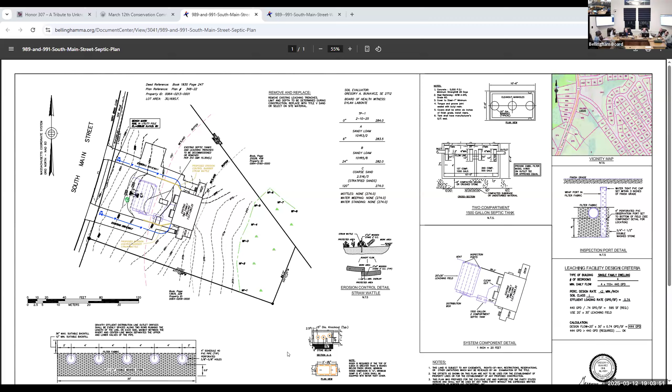I'm not fully aware where the existing one is, it's in the front yard. It's all going to be in the front yard. Is the existing leach field... it doesn't show where the existing leach field is, good point, it does say on the plans but I can't read it. Yeah, the existing leach field is in our front yard, there's really no other place to put it. Right, but I don't know if plus or minus 10 feet is the same, but the general location is the same.

I think it shows it right here. Which one's the existing leach field? This is the new one, where's the text? Arrow pointing: existing septic tanks and leaching trenches to be decommissioned or removed. Yeah, it just shows the tank. I assume there's two tanks there.

So we're looking at the new plans, just trying to identify the old tank, which seems to be right in the center in front. There's two tanks. There's two current tanks there now? Yes, it's a condo duplex. Okay, there's a new one, and here's the old one shown.

Existing septic tanks, but it shows one block - are they next to each other or side by side? No, they're on the front of each part of their own duplex, there's another one just south of it. A little confusing because the arrow showing existing septic tanks and leaching trenches looks like it's going to a single box, right center in the middle of the front of the building.

There's another arrow, and that's a tank that borders up against the driveway, I guess. There's an old tank overlaying on top of the new tank, in front of the driveway, 90 degrees to the new tank. So it appears there's a certain amount of removal of the existing system, one of the tanks and the leach field, to install the new one - actually, both tanks, according to the applicant.

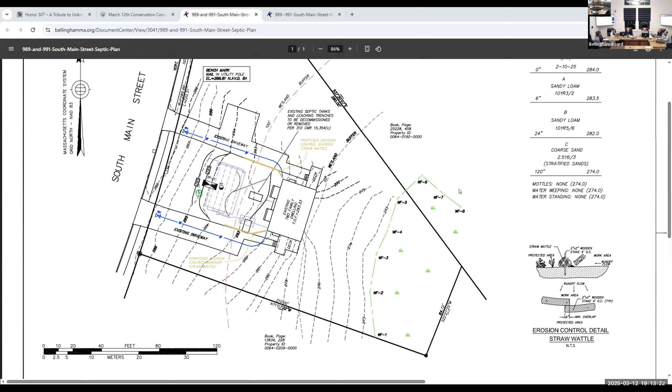And Rita Pascal, Director of Environmental Affairs at Keolis, and Matt Donovan is the representative. Matt, are you online? I see your face. Okay, great. You're representing tonight for the MBTA, yes? Yes, I am. Okay, welcome.

Thank you — we've been sent, just for your record, Matt, a previous 2020 form that was very similar, for a similar vegetative plan, maybe the previous plan from you guys. This is basically just another renewal for the 5 years. Still looks like the form is almost identical, if not identical.

Yes, exactly. If you wouldn't mind, since this is just a once-every-5-years thing to come in front of your commission, I wouldn't mind going through the work, kind of giving you an update of how it goes on a yearly basis. Sure, that's fine. Okay.

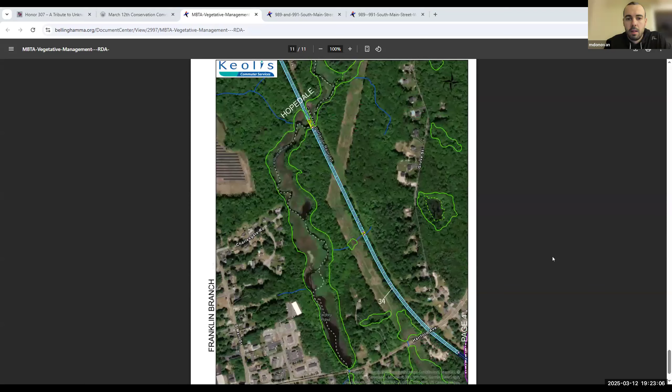Any idea what you're spraying? I can pull up what we're spraying in 2025, but it's different every year. Slightly different, all coming from the approved chemicals list, and it kind of happens on a cycle because some of the vegetation grows a resistance to the chemicals if you use the same exact mixture every year. So they switch it up slightly every year.

We just sent the yearly operational plan to your commission a couple weeks ago, which is separate from this 5-year vegetation management plan maps. The yearly operational plan is sent to your commission every single year. And that's not an RDA or anything, it's just more a notification to your commission. We include the mixture in that.

And who approves this list of chemicals? It's the Mass Department of Agricultural Resources, but it's kind of a joint effort with the Mass DEP, and there are all kinds of studies that go into it.

I know I've seen some of the studies, and they check the absorption rate and the runoff, and they test the water in certain areas downstream of where it's sprayed. Once they see that there's no trace of the chemicals, that's how they determine the setbacks in the first place. So it's ultimately the Mass Department of Agricultural Resources.

What is the management plan and method for the yellow zones? So in those yellow zones, any wetland that's within 22 feet of the center of track will automatically trigger a no-spray zone, because when they do the roadbed treatment...

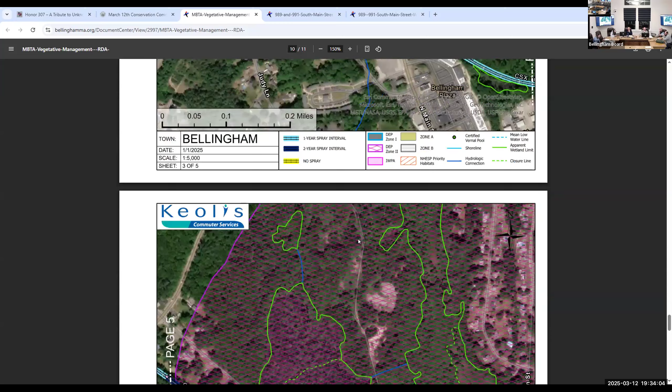Can we go to page 4, please? All right, you just went past it. Right there, in map form.

So if we start at the top with the long yellow, and then we hit the second - this is just one example, it happens I think 3 times here - the second yellow starts and stops very close to the water, in my opinion. Can that yellow section not be extended? Yeah, it almost looks like you're starting right at the edge of the river.

Yeah, it can be extended. It's required to just a 10-foot buffer. It does look, I think, a lot closer than it is. If you were to see it in the field, I think there's still plenty of buffer there. But if it makes the commission feel more comfortable about it, I could extend that.

And it looks to me like the concern would be on the south side of that. Is that - well, it happens 3 times on this page, in my thoughts. So are you agreeing with me? Yeah, I was wondering, how come it's 22 feet and not like 25 feet, which is our notice served?

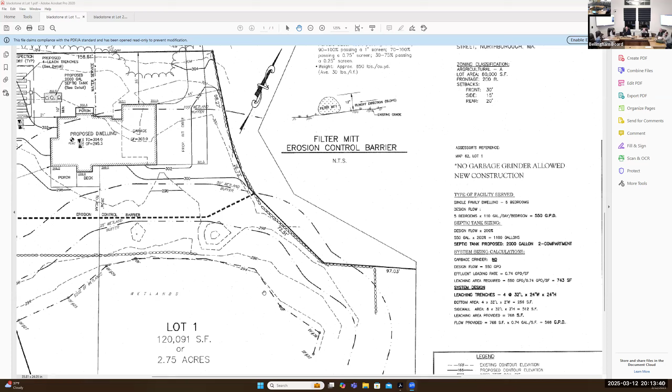Where would that location be, Hannah? If you go to BF 36, and then just northwest of that, right over the stone wall. On the abutting property? Well, a little bit within the property line, it looked to be, but yes. Are you talking about this area over here? Off of this, exactly. Okay, that's good to know, helpful.

Any additional questions, observations, comments? I think our next step would be to have him reflag the resource areas.

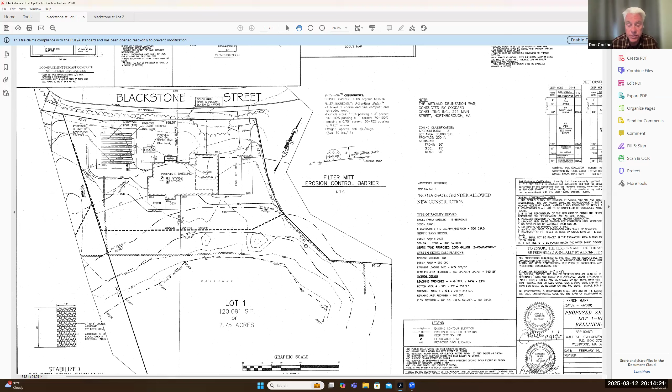Don, are you raising your hand? Yeah, I did have a question. Speak up. How many trees over the size of, say, 4 inches in diameter would be removed within a 50-foot or 100-foot buffer zone? I don't have that, I'm sorry, I can't see the plans all that clearly.

Actually, Don, on the notes Hannah provided, there was a similar comment: the applicant does not indicate the number of existing trees of 10-inch caliper or greater where the work is proposed, or the amount of fill proposed. So there's some more information that's going to be needed. I don't think Robert has that information, but that's something we certainly would want to get going forward, for sure. Thank you.

So I think these two lots are outside of that natural heritage area. The rest of it is, yeah, but they're just outside. I think single family homes are also exempted.

Well, we can ask, even when they're constructed by the developer, we can make sure BSC or Hannah double checks whether single family homes are exempted from MESA for this kind of proposal project.

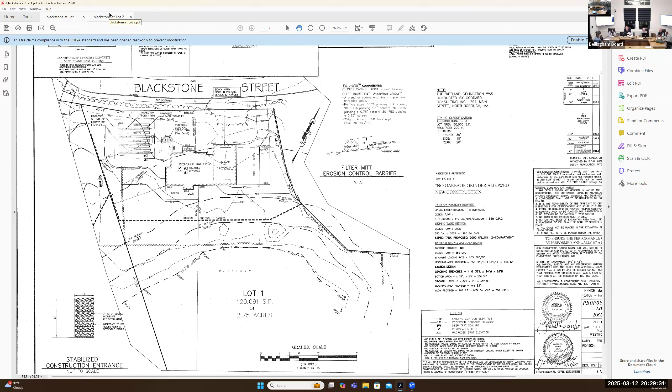All right, moving right along, don't go anywhere, Robert. We have a new hearing, notice of intent for A&R Lot 2, Blackstone Street, map 62, Lot 1, for construction of a single-family home.

Wait, why would they both be Lot 1? Is that a mistake there? This is map lot 2, 62 Lot 1, and it's A&R Lot 1, A&R Lot 2. So they're still both on Lot 1? Because Lot 1 hasn't been subdivided. Okay, I just want to make sure that was accurate. I just wondered if there was supposed to be a 2 there—it makes sense too.

All right, for construction of a single family home with grading in the 100-foot buffer zone, BVW was flagged—Wall Street Development, the applicant, and once again, Robert here is the representative.

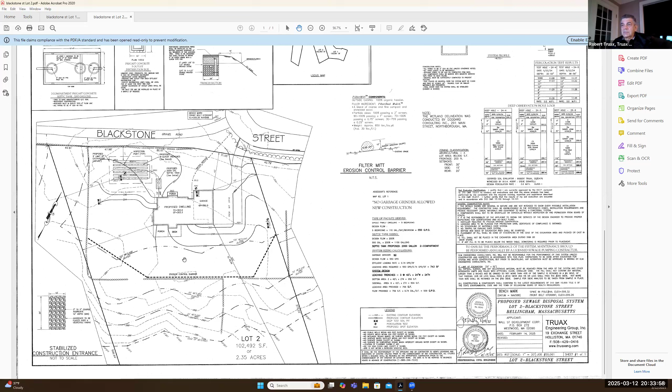I just kind of took advantage of that. We can look at that in the field, we can evaluate that in the field. I'm thinking of it from their perspective — why not engineer out of the 100-foot buffer zone to then no longer need to file with us? That's my question.

Heard his response, I guess. Good thinking. I mean, you could squeeze it, and maybe get out of the 100-foot buffer.

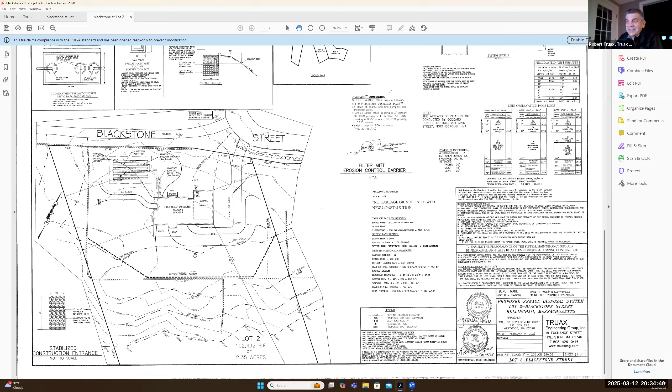I think if someone buys the house lot, they're going to come back and ask to have a backyard at some point in time. They'll just encroach, or they'll just encroach. I guess while it's in front of us, we can determine our limit of disturbance and then put some signs up.

It doesn't have to be at the 25 foot, which is where we usually provide signage and badges. It could be wherever it needs to be, for what you just read — middle of what might be proposed as a yard.

It could be well in front of that stone wall potentially, but I think a site visit will help us determine this and put things in perspective. Nothing like laying eyes on it.

Any other questions about this? It's very similar to lot one, but there are a few differences, so if the commission has other questions, now's a good time. I think all the same requests we asked about lot one should be carried over, including staking out the corners.

Reflects the flags. We'd like to do the site visit on the same day. That's very possible, though demanding - we might have to rent a bus.

Any other comments, Don or Pam, that you'd like to make sure are reflected by the applicant or things done by the applicant? Looks like we're going to be doing a repeat of lot two, lot one's flagging and staking and so forth, timing and so forth will all be the same. Sounds good to me.

One request before the next hearing - we don't need this for the site walk, but if we can get a sequencing plan on construction. I mean, these are pretty simple lots, but step by step of what's happening in what order. Sure, we'll put that right on the plan. Good point, might be helpful to have that sense of things.

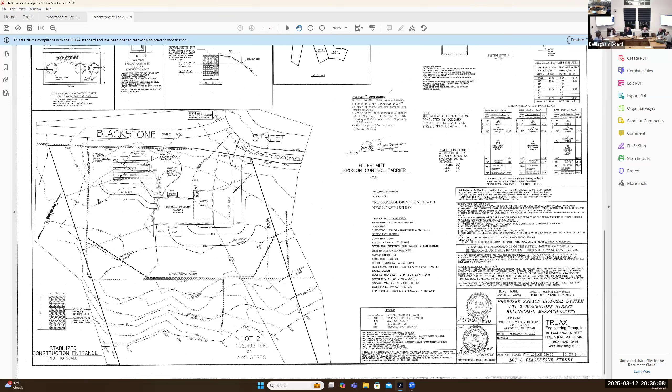Anything else, Steve? Leo? No questions? Hearing none, seeing none, I'll take a motion to continue this NOI hearing for A&R Lot 2, Blackstone Street, map 62, lot 1, to the evening of April 9th at 7 p.m., with the intent of having a site walk between now and then and having all the verifications done, similar to the previous project which we just continued.

Somebody got a motion, that would be nice. Thank you, James. Second on the motion. Okay, any other discussion about that? Carry on, saying Don - Don?

Aye. All right, Pam? Aye. Ariane? Aye. Neil? Steve? James? Aye. Mike, aye. Okay, so it's unanimous vote.

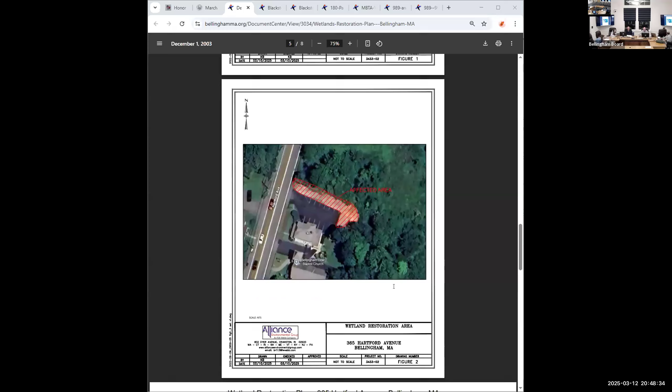That's 100 feet? You're telling me it's 100 feet from there to the water? Doesn't look like that when I drive by. No, the property line is in the water.

This is inaccurate, very much. Oh my God, look at that - GIS based wetland data is not accurate. That's crazy. You mean the pond isn't built to... what a thought. Because based on this, you could put this whole house between the affected area and the stream.

Good point. So are we questioning the size of the affected area or its location? That's the only thing I was questioning, yeah. That was - I mean, it could go up to the property line.

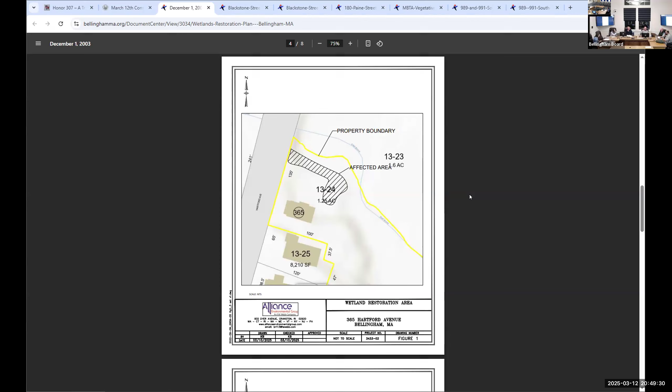See it from the street - looks like that's what I highlighted. See it from the sky. Yeah, it looks like this is highlighted not based on the actual disturbance - so some of the tree canopy is going over the disturbed area in that image.

Inaccurate or not, what do you guys want to do about it? You want to make them do it over? I don't think it's indicative of anything. I'm just confused about their intention - is their intention to restore it and leave it? They have three options.

Aren't they restoring it and planting bushes in it - planting bushes, restoring it, trees along the top, yeah - and then parking on it anyway, or they can request to just leave it permanently for parking, and we permit the project like that if we want. Those are the three options.

Permit or deny. Right. But I don't get a clear picture from what they provided on what they plan on doing. Exactly, there's some ambiguity there.

You have to - from speaking to him, I had only suggested just going forward with the enforcement order, and then perhaps doing an RDA if they're changing out the washed stone or something, because it sounded like to me that they were just planning on restoring. It wasn't like they were asking to keep work that they had done. And if we just kept it as an enforcement order, they wouldn't have to do a whole NOI because we wouldn't be permitting any work other than work to restore it.

So that was my thinking, and based on my conversations with him - he came in on Monday because he hadn't been able to get in touch with Alliance yet, and he was trying to make sure we were on the same page with everything.

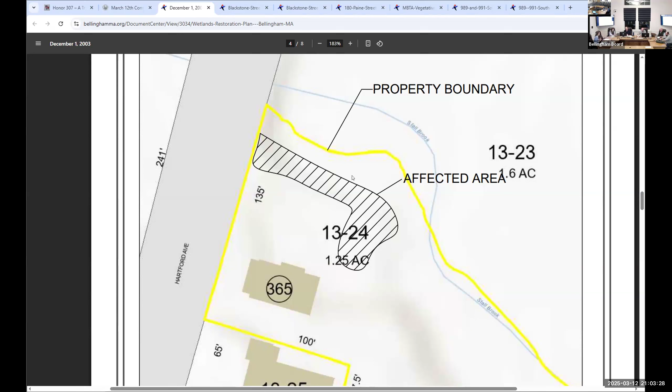Am I seeing it right that they have like 4 bays for big piles of manure? That's essentially what they've created. It was kind of like a weird setup.

Sounds like a lot of surface in general with the pasture being out there. And then he kind of dug out a couple little areas, but the property itself just kind of slopes like that, which you can't really tell so well from the aerial photos. It's a big slope and just washes out right there.

Yeah, but I was surprised there wasn't more erosion or sediment runoff into the wetland areas. The wetland does creep up into that pasture corner, but it's been maintained as pasture for a really long time, so I wasn't concerned too much about the structure and vegetation. The water looks gross and stuff, so he said it drains really fast.

I went the day after, there was a ton of rain, so it might just kind of drain right through there. It seems like pretty sandy, rocky material. I'm just thinking, someone else may have mentioned this, they're doing landscaping, we might need an enforcement order for that too if I go through this.

Aren't there certain agricultural activities that are exempt? Yep, landscaping yards, but aren't... one of them. His plan, when I talked to him on site, is he's moving stuff elsewhere anyway.